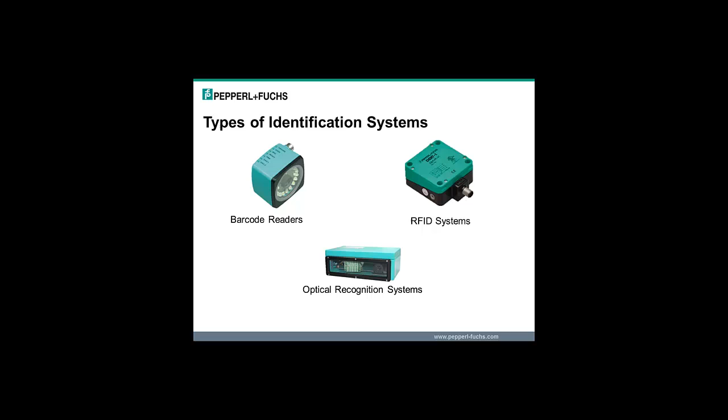An RFID system is a non-contact system that has a read head with an antenna that reads a tag. Data is transmitted between the two using a specific frequency. The third type is also optical, but instead of reading barcodes, it reads codes in other forms. For example, it could read a series of holes drilled in a code plate for use in the high-temperature paint industry.

The identification systems can be broken up into two categories: optical systems and RF systems. Optical systems use a camera, laser beam, or other type of imager to distinguish marks of a product. Because they are light-based, these systems require line of sight. They may not work very well in dusty and dirty environments because the optics could get blocked. Laser-based systems also have mechanical components that give it a limited life expectancy.

RF systems have no optical components. They can hold up in the dirtiest of environments. Line of sight is not required, so it can read through dust, the human body, water, and so on. About the only thing it can't read through is metal. You can also write to RF transponders.

Here's a quick look at a comparison between optical and RF systems. The one thing that stands out on the optical side as far as advantages is the integration effort. Optical systems have been used for years. Barcodes can be incorporated into scan sheets and routing documents with little effort and no additional cost. Barcode data is typically coded in ASCII, and once scanned by the barcode reader, appears on the screen as if you typed it. Many, if not all, barcode readers are interchangeable.

What RF systems lose in integration effort, they make up for in every other category. You can write data to tags, updating them on the fly. Line of sight isn't required because the RF system need not see the target. Also, unlike laser barcode systems that use a rotating motor, no moving components are required.

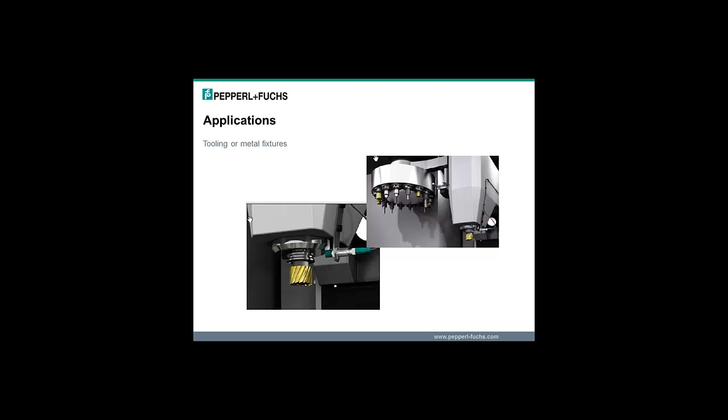This is a classic RFID application, and probably one of the first ones ever to use a Pepperl+Fuchs system. Machining centers need to verify that the correct tool is in the fixture before the machining operation starts. If the wrong tool is in place, it could cause hundreds of thousands of dollars of damage. In this picture, the green chip is mounted in the side of the tool holder, and the read head verifies the correctness of the tool before work starts.

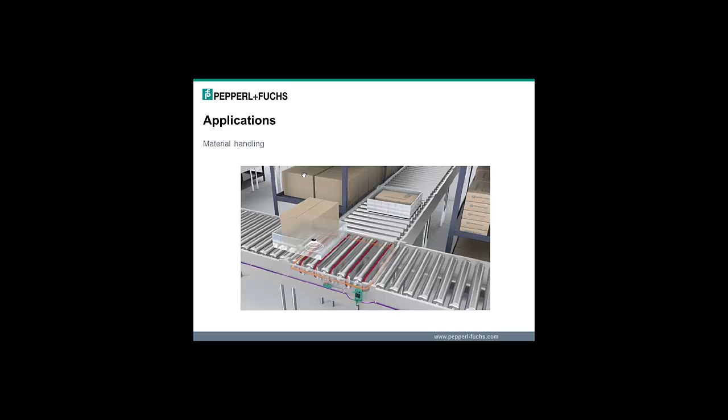RFID is common in material handling. The tag is mounted to a tote or pallet that carries the parts being modified or worked on. The work is performed at each station. Pass-fail information can be written back to the tag, making all historical manufacturing data ready for the next station. At the end of the process, a good part can immediately be passed and sold to a consumer, and bad parts can be routed to an offline rework station for repair. Later on, after repairs are complete, the parts can be sold and no bad products ever get to the consumer.

In process applications, hoses from a manifold frequently get connected together or get connected to a tanker truck. Before the valves are opened and a liquid product gets routed through the pipes, the RFID tags are read and connections are verified. A wrong hose connection can cause the wrong mix of products. All of that product could possibly end up in a landfill. Before RFID, everything was inspected by eye and double-checked by a second person. Even this was not enough to prevent mistakes.

RFID used in machine access is relatively new. The idea is to prevent anyone from entering the machine without the proper credentials. This might be an important process, and only a specific supervisor has the authority to perform it. These RFID systems go directly into PLCs and are located on industrial equipment, so standard commercial RFID door access systems are not appropriate. This also allows you to track the workers who use a specific machine, allowing for complete accountability for a job. This is just a small selection of applications.

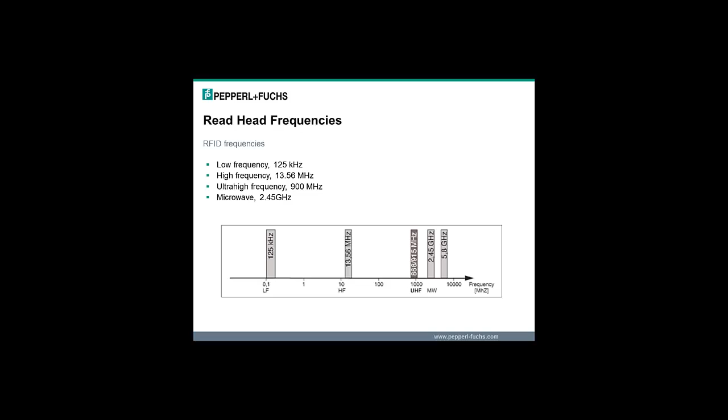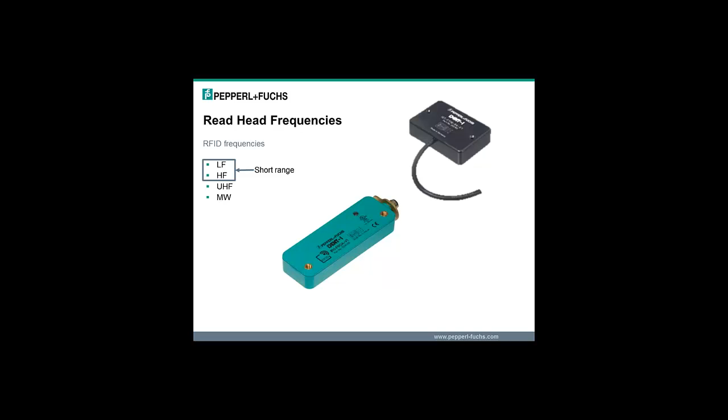Pepperl+Fuchs RFID systems are available in 4 main frequencies. These systems will be abbreviated low frequency, high frequency, ultra high frequency, and microwave respectively. In general, the lower the frequency, the less range you will get. The low and high frequency RFID systems are categorized into the short range category. Maximum range is typically 6 inches or less. The ultra high frequency and microwave frequencies will be our long range systems. Read range will be up to 6 meters.

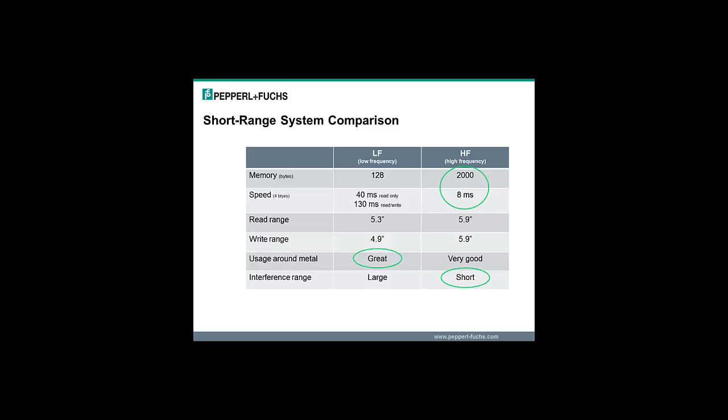The low frequency system was our first system. The lower the frequency, the more penetrating power the system will have, and it will be better around metal intensive environments. The high frequency system is also good around metal, but typically specially tuned tags or large spacers are used. The higher frequency system is an open system with many more chip manufacturers, resulting in higher capacity tags. The higher frequency system also results in cheaper tags, faster speeds, and a shorter interference range.

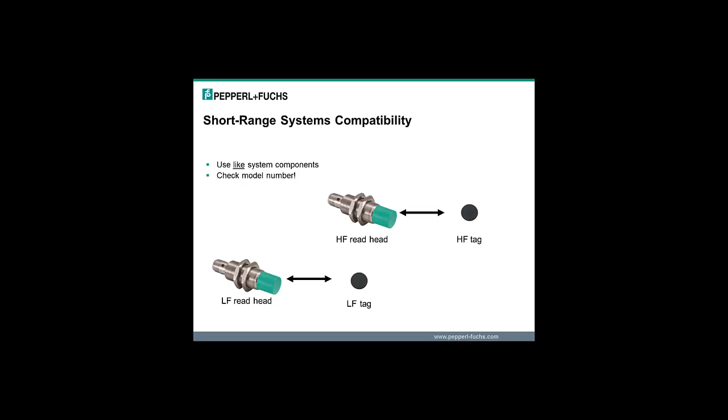All systems have a read head and tag. The tag may also be known as a transponder, and the read head could also be known as an antenna. Low and high frequency systems are not interchangeable. A low frequency read head must be used with a low frequency tag, and a high frequency read head must be used with a high frequency tag. Check the model numbers to make sure the system components are compatible.

The nomenclature is simple. All high-frequency systems start out IQ. For example, a read head is an IQH1-FP-V1, and a tag may be IQC21-30P. All low-frequency systems start out IP. For example, a read head is an IPH-FP-V1, and a tag is IPC03-50P.

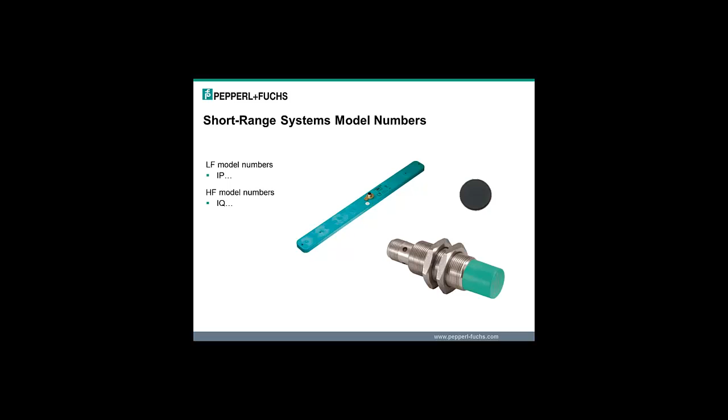Within the short-range RFID systems, the high-frequency system is special. Neither low-frequency or high-frequency systems are proprietary, but the ISO 15693 standard that high-frequency systems adhere to makes it widely adopted. There are a very large number of chip suppliers that provide products to companies like Pepperl+Fuchs. We then embed this chip and antenna coil into an industrial housing. We can read tags made by our competitors, and they can read our tags. There is no longer a worry that we will discontinue something that you can't get anywhere else. RFID systems are now worry-free, and your investment is safe.

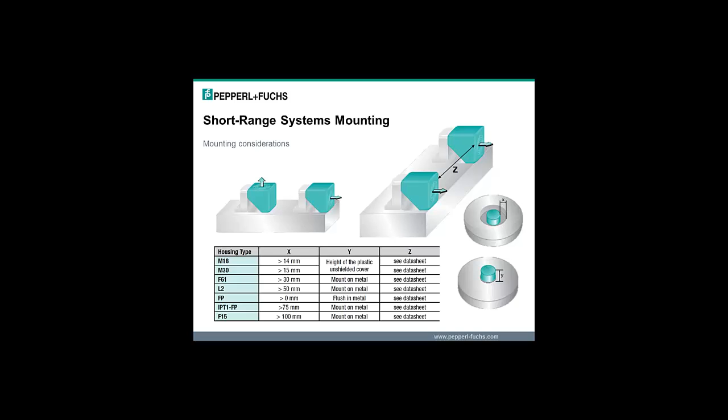When mounting our read heads in or on a metal surface, take note as to how far the plastic tip must be away from metal. The L2 Rhino-style housing must hang over the metal surface by 50 millimeters. The tips of the cylindrical read head must be completely exposed or flush with a certain amount of metal material removed. When mounting according to this table, you are guaranteed more than 75% of the maximum documented read range.

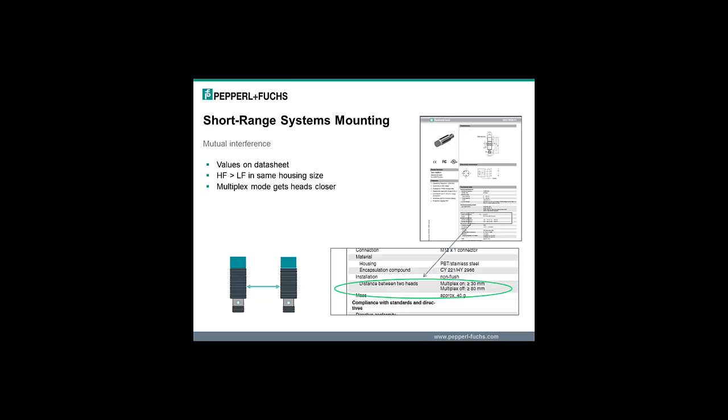If 2 read heads will be running at the same time and you want no multiplexing either by the user or the controller, then you must separate the 2 heads by the multiplex off specification. In this example, 2 high-frequency heads would be separated by 80 millimeters minimum. If 2 read heads will not run at the same time, or will be multiplexed automatically by the user or a controller, then you must separate the 2 heads by the multiplex on distance at a minimum. Even though the head is not running, the resonance circuitry of the read heads will still interfere with one another. For some perspective, the same size low-frequency head requires 180 millimeters of separation minimum.

Let's talk about the read range a little bit. The range is specific to certain tag read head combinations. On each tag datasheet, you will see a curve that shows where the tag can be read when the tag is parallel to the read head. All the read heads will be on one graph. Depending upon the tag design and the testing done, there may be curves for mounting on non-metal surfaces. We call this in-air mounting. There could also be curves for on metal with spacer, or for flush mounting in metal.

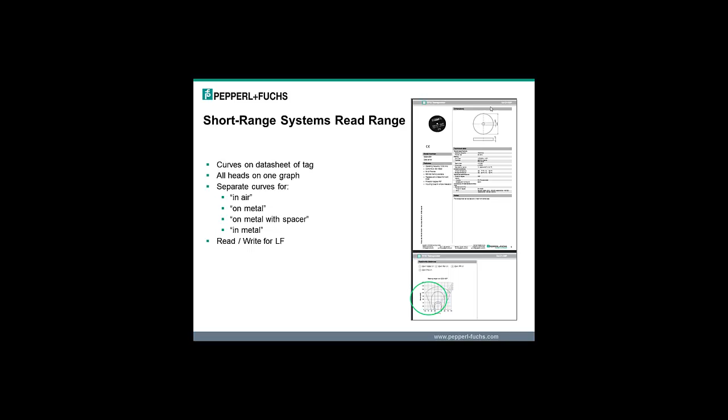High-frequency tags can be read and written at the same range, but the low-frequency systems have a shorter write range than read range. For low-frequency read-write tags, there will be 2 curves for each, one for reading and one for writing. This is an example of all the measured read range curves for the IPC03-50P tag with the 18mm, 30mm, flat pack, System P head, Rhino read head, and F15 large read head. You can see the largest read range for this tag is for the largest read head, IPH-F15-V1, at 110 millimeters. If you want to achieve the most range possible, bigger is better.

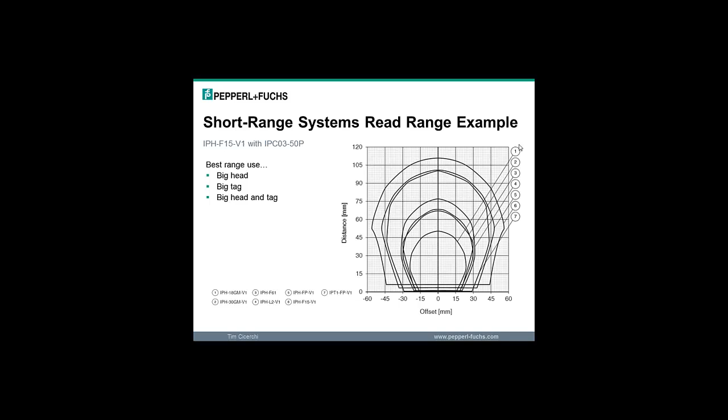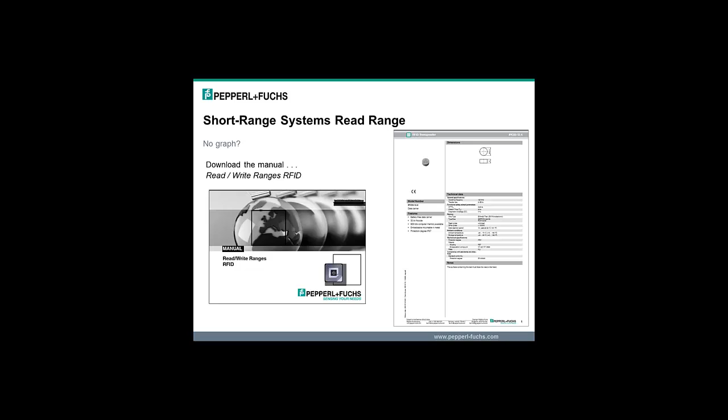Generating the graphs takes a lot of time, so not all tags, especially non-standard ones, have read range graphs. The maximum ranges have been successfully tested, however. If you look the part up on our website and check under Documents, you can download this file. It is called the Manual Read-Write Ranges RFID.

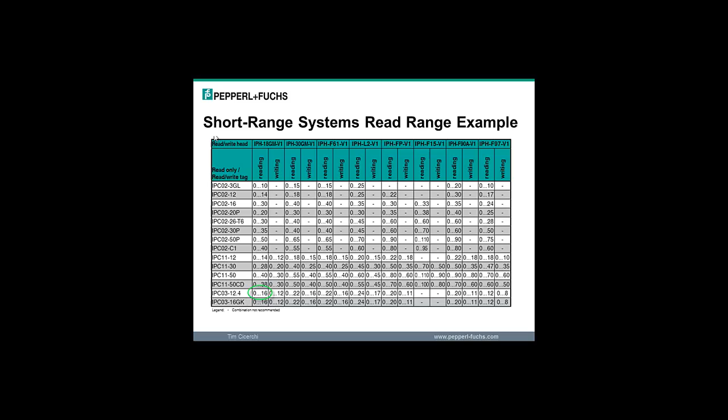This is a table from the Read-Write Range document. In this circled example, the tag can be read from 0 up to 16 millimeters for reading and 0 up to 12 millimeters for writing. Many times, a read head is triggered to read a tag as it is stopped over the read head. This read field curve, as listed on the datasheet, guarantees that 99.9% of all tag and read head combinations can be read under that curve.

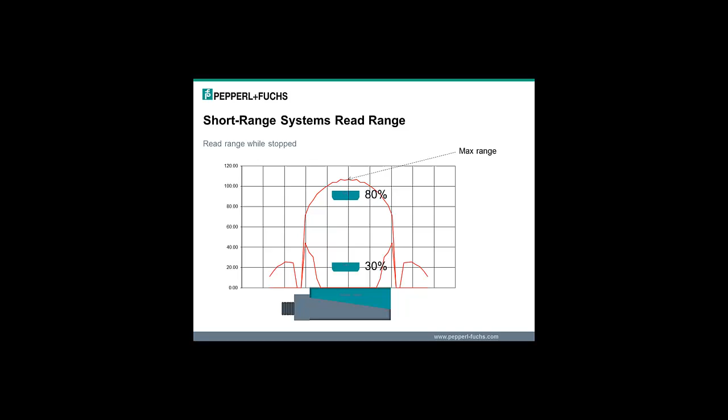It is suggested that you mount the tag from 30% up to 80% of the maximum range from the reader. Any closer and you risk mechanical damage if the tag hits the head. Any farther and the mechanical tolerances could take the tag outside the read zone. If the read head is running a continuous read command and the tag will be flying by the read head, you need to be a bit more particular about this mounting.

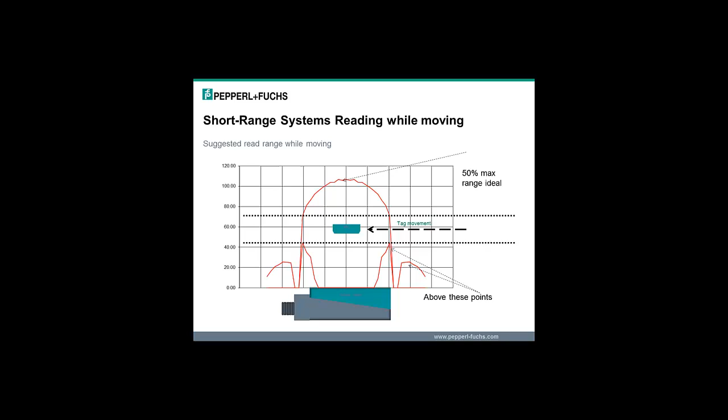To maximize the read speed, the tag needs to be in the field for as long as possible. This means the fattest part of the graph. We suggest mounting it at 50% of the maximum read range. You want to make sure the tag isn't any closer than where the read field starts to get narrow at the bottom, and it must be well above the side lobe. Don't make it any farther than where the read field starts coming to a point at the top.

Certain tags can be mounted flush in metal. Never recess the tag or the range may be severely reduced. Typically, aluminum has a little worse read range than steel, but check the datasheets to see if there are different read field curves. These special tags are thick and have ferrite cores. This ferrite material allows the read head to read the tag properly even when flush mounted in metal. Embeddable tags come as small as 8 millimeters or as large as 30 millimeters.

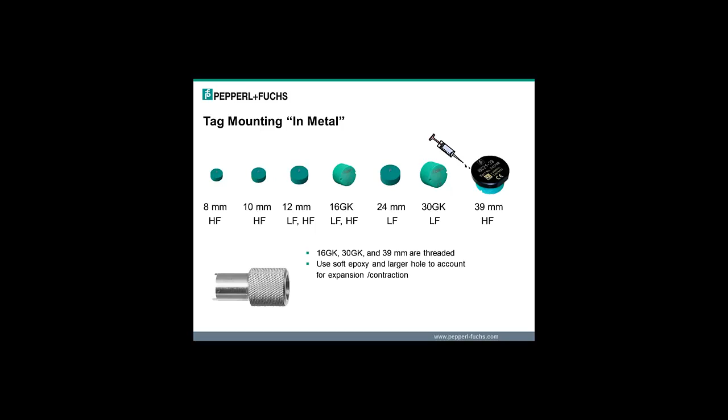The 39 millimeter tag actually has a 30 millimeter threaded body with a cap that lays on the surface of the metal. When gluing tags into place, use a soft epoxy to account for expansion and contraction of the different materials due to temperature. You also see here a picture of a tool that can be used to insert or remove the 16 millimeter or 30 millimeter tags. It fits in the holes located on either side of the front of the tag.

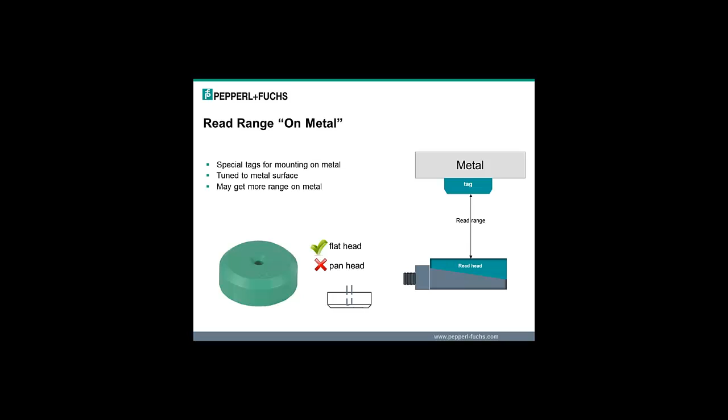Often, but not always, metal mount tags are thicker than normal tags. They have the spacer built into the housing. Use the correct screw when mounting any tag, especially if it is a high temperature tag. If the tag is too tight, the housing could expand and crack under the pressure. The metal mount tags range in design from the conveyor mount rectangular style to thick cylindrical versions. There is also a special high-frequency metal stick tag that has an adhesive back. These tags should only be adhered to a smooth, clean surface. Once attached, they won't come off without damage to the tag.

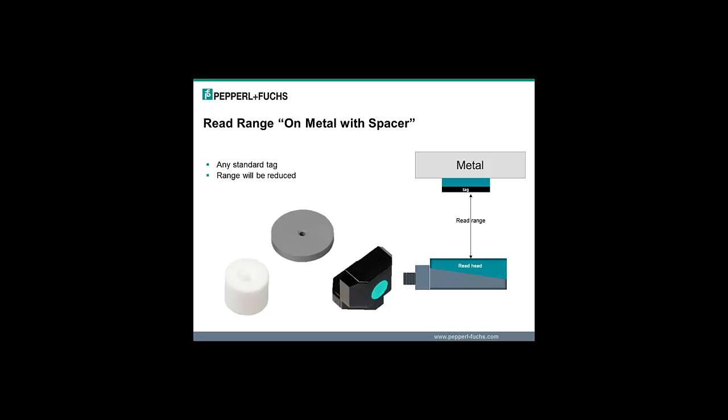You can also take a standard thin tag and mount it on metal using a spacer. There may be a read field curve on the datasheet with the range with 10 millimeter spacer. Also in the read range manual, there is a table for this specific case. Any tag that uses a spacer over 30 millimeters will get little or no read range reduction. Check out the different accessories available. We offer 7 millimeter spacers, 30 millimeter thick spacers, and mounting blocks for 16 millimeter tags.

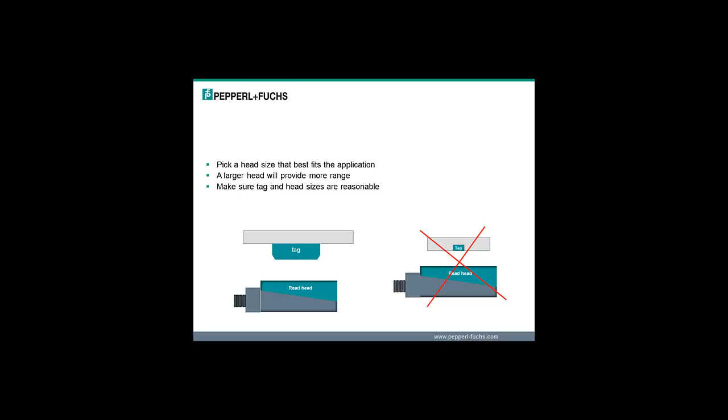You should also use hazardous location tags with it. Otherwise, just pick the read head that physically fits best in your application and that gives you the range that you need. To recap, when matching up a tag and read head, make sure the sizes are reasonable. For example, you may not want a large flat pack read head matched up to a 10mm diameter tag.

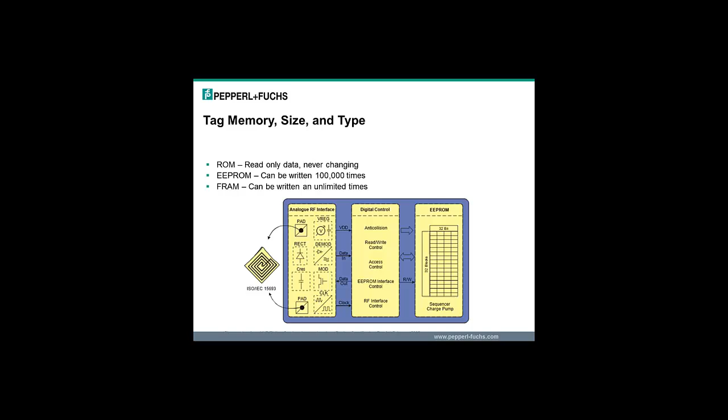If you are going to be writing to the tag hundreds of times a day, then think about using the FRAM tag. If you want a read-only tag, you don't have to focus just on the IPC02 low-frequency read-only tags. All tags have ROM data on them. As long as you stay within a specific model number like IPC03, all tag numbers will be unique. We call these unique read-only codes that were lasered at the factory fixed codes. Our available tag options are ever increasing.

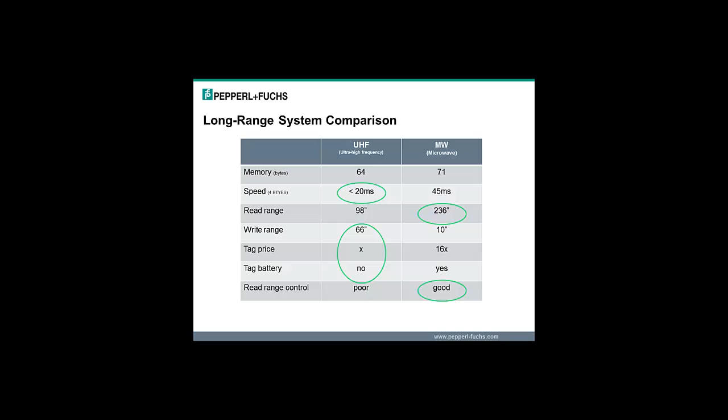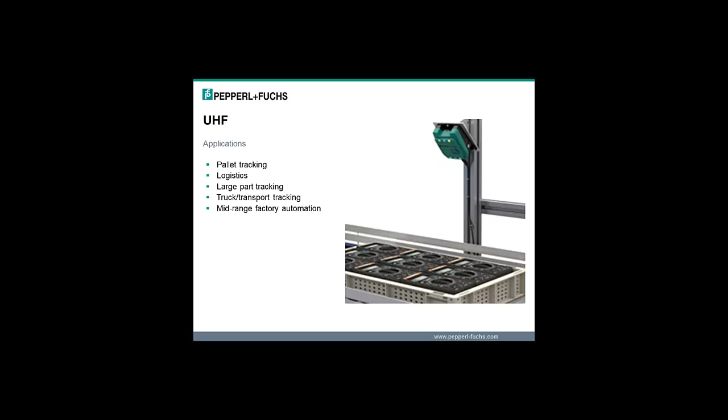There is no battery, which drives the cost down to as low as 10 cents per tag. Write range is a lot longer than microwave, but I think most people use both microwave and UHF systems as read-only systems. The unique identifier on the tag is used to distinguish one tag from another. Because UHF tags have no battery, many long-range logistics applications open up. You can track pallets in and out of a facility, and you can track trucks through a gate access system. Well-controlled UHF systems will also be used on the factory floor to track cars and other large objects.

The UHF frequency spectrum is controlled by the specific telecommunications agencies from within that country. You cannot buy one reader and expect to use it in the USA and Germany at the same time. There will be at least 3 specific models for various areas around the world. The USA version will work with most parts of North and Central America. Other readers will be for Europe and China. Other countries around the world may also fall into one of these frequency bands. In addition to frequency bands, every country has certain UHF frequency access and power requirements.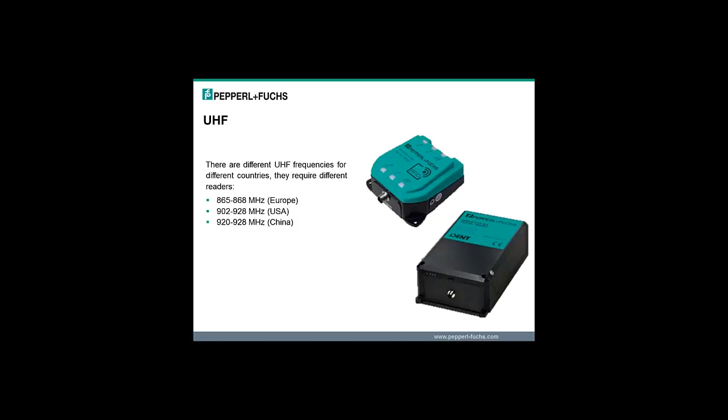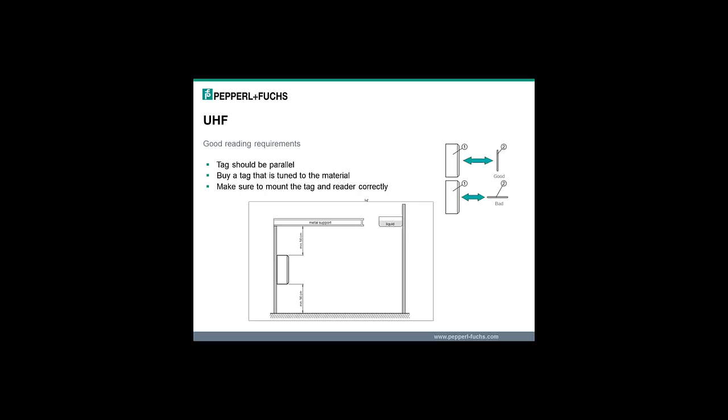Tag mounting in UHF is not simple anymore. You have to be aware of the material that is between the tag and reader, as well as the material the tag is mounted on. Typically, you buy a tag for mounting directly on metal or one for mounting on non-metallic surfaces. When setting up a UHF system to maximize range, the tag should be parallel to the reader. Also, obstructions around the reader and tag must be taken into consideration. It isn't just the object directly between the tag and reader that has an effect, but also the devices next to them that will have an impact.

Most UHF tags are polarized. You can use a linear, polarized antenna and align the tag and reader either vertically or horizontally, or you can configure the reader as a circular polarized antenna. A circular polarized antenna can read a tag in any orientation as long as it is facing the reader.

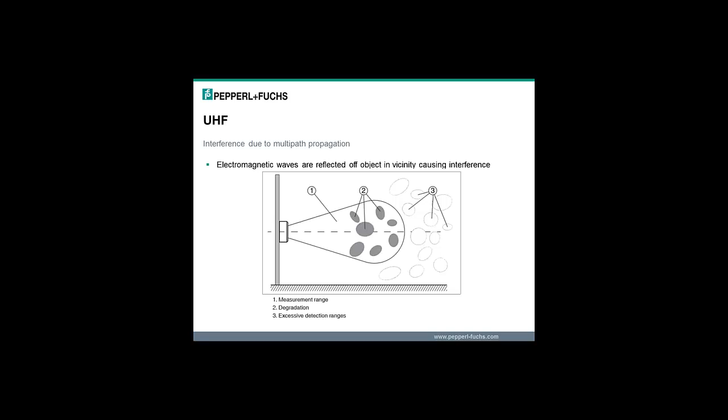UHF systems can be susceptible to interference. The interference is caused by the field generated by the reader bouncing off objects in the vicinity of the tag and reader. You can get two different effects. Signals can combine in a degrading effect, causing a hole in the read field. If you put a tag in this hole, it would not be readable. The second effect is an additive effect where an excessive read range can be achieved. This can lead to unforeseen consequences of reading a tag in another work zone or another production line.

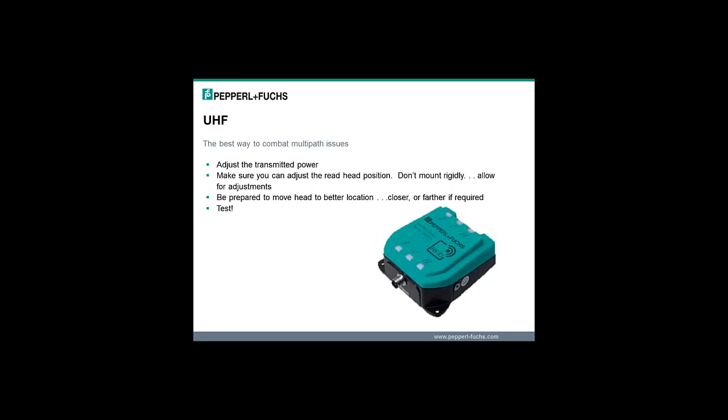To minimize multipath propagation problems, try to keep the read power as low as possible. Keep as many obstructions out of the way as possible. In your design, allow for adjustments. Use accessories that allow you to move the reader into different positions and make new trials. In the end, you're going to have to test your system to make sure it performs the way you want it to.

There is a huge market of UHF tags. You can find tags that range from 10-cent sticky tags to $30 high-temperature tags. All tags have a unique identifier as well as a user-definable EPC code. In addition, there may be a certain amount of read-write data available for use.

We say microwave when talking about a frequency of 2.45 gigahertz. It is true that it is the same frequency that is in your microwave oven, but at far less power. It is the same safe frequency that is used with a Bluetooth wireless headset, keyboard, or in your car. Also, it is the same as Wi-Fi that you use at home, 802.11b or g.

Microwave applications are long range. Because the maximum range is 6 meters, it is perfect for final assembly for an automotive manufacturer. It is also used for mobile transport tracking of trucks, buses, or trains. It is also used in other factory automation jobs where long read range is a must.

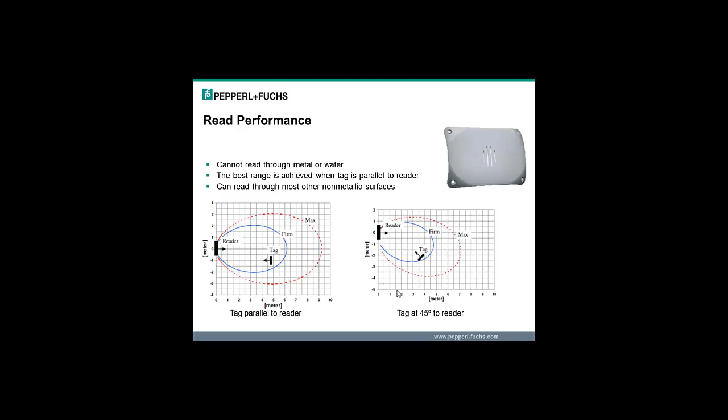The two main things that will affect the range are water and metal. They will obstruct the view of the tag to the reader. The mount of the tag on a metal or non-metal surface is not a concern. Either are okay. For maximum range, the tag should be oriented parallel to the reader, and the long dimensions of the reader and tag should be lined up.

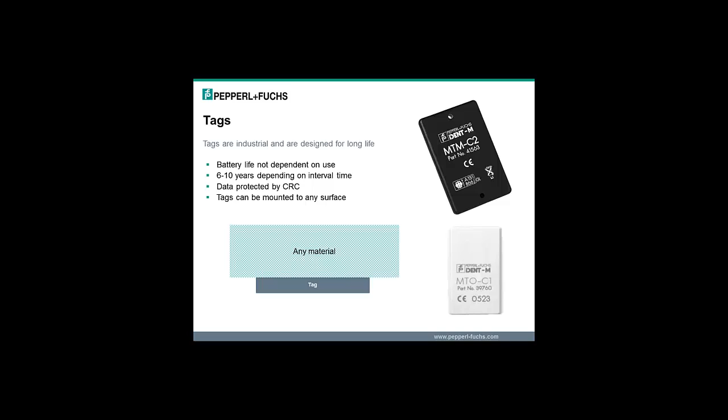The microwave tags send an ID frame to the reader that contains the read-only data, user-definable data, the CRC, and the status. You can also configure the frequency at which this data is sent. The quiet time, also called the tag interval, is a multiple of the ID frame. The quiet time is either 0, 4 times the ID frame, 8 times the ID frame, or 16 times the ID frame. The longer the quiet time, the longer the battery will last. During this quiet time, other tags will have a chance to talk. So in general, the longer the quiet time, the more tags can be read at the same time.

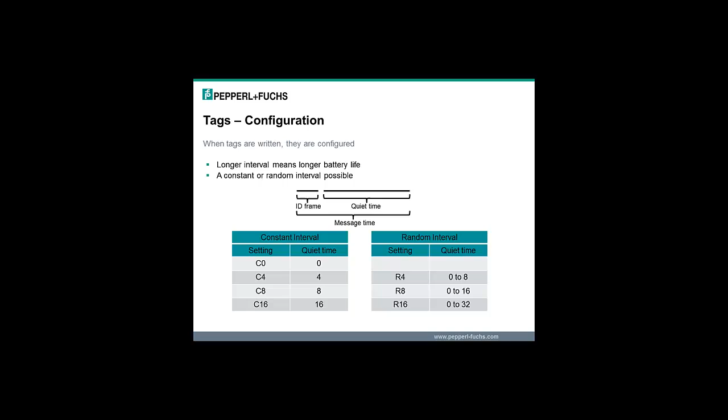To reduce the risk of two tags sending their data at exactly the same time, a random interval should be used when multiple tags are in the field. The read-only MTO tags will always send data at an R8 random interval.

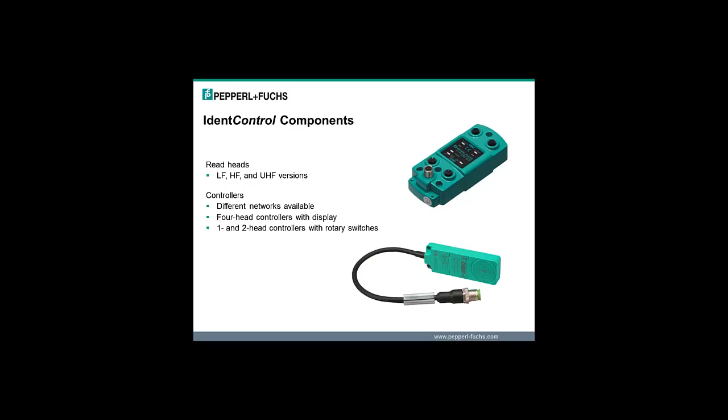There are 4 different RFID systems provided by Pepperl+Fuchs. They are IDENT Control, IDENT-I System P, Standalone Systems, and IDENT-M System T. I'm going to talk about each one of them next. IDENT Control is a very powerful system consisting of a read head and a controller. You pick the read head with the right frequency, size, and read range, and then pick a controller that will connect to the upper level bus that you need.

The controller concept allows us to make one network controller and then have it immediately available for all low frequency, high frequency, and ultra high frequency ident control compatible read heads. Read heads can be as small as 18 millimeters in diameter or as large as we want. Using a controller allows for the integration of a wide selection of connector options and multiplexing.

Cost is reduced because only one network is needed for up to 4 read heads. Also, the bandwidth is reduced because one TCP/IP message is sent per controller rather than per read head. Easy configuration is now possible. A graphical display and keypad or rotary switches can be used to configure the network.

2 controller options are available. A 4-channel version has a larger housing that is capable of supporting push-pull connectors, a graphical display and keypad, and up to 4 read heads. The ident control compact supports 1 or 2 channels and is limited to configurations using rotary switches. All network interfaces and power connections are using standard M12 connectors.

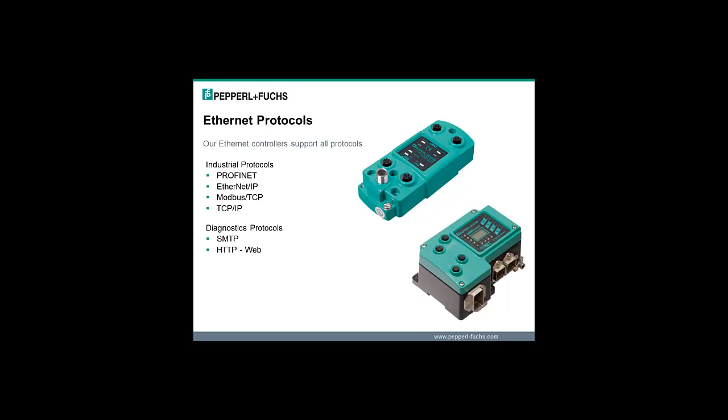We have industrial controllers made for DeviceNet, Profibus, Ethernet, Serial, CC-Link, and EtherCAT. Not every network is available for both the standard or ident control compact version. Pick the controller and network interface that best fits your needs. Our Ethernet controllers support all Ethernet protocols at the same time. If you communicate to these controllers with Profinet and then decide to change your PLC platform, you can quickly and easily switch over to EtherNet/IP or another protocol.

In addition to the industrial protocols, SMTP email protocol is also supported. If a status message is generated because no tag is present or a read head is damaged, an email can be sent to a maintenance crew to go and fix the problem. The web interface allows you to quickly look at the configuration of the unit, and all recently sent commands and responses are logged. This log can be analyzed as an advanced troubleshooting tool.

People sometimes ask what network protocol to choose. The customers know, just ask them. Based on the PLC you are using, the network choices are typically obvious. For example, on Allen Bradley PLCs, EtherNet/IP is the network of choice, but Siemens will use Profinet. Mitsubishi will use CC-Link, and Schneider will typically use Modbus TCP protocol.

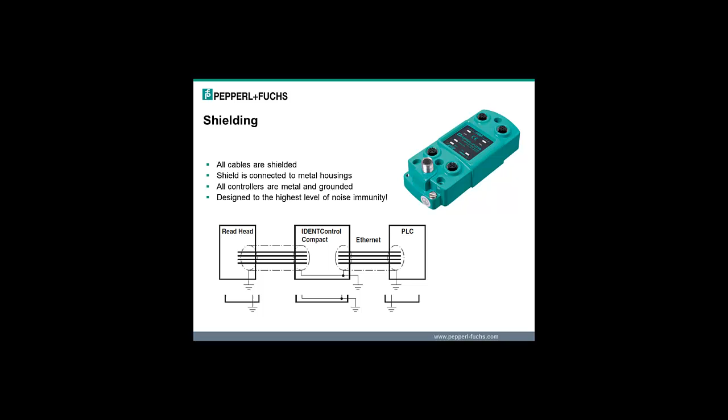All controllers are made from thick cast metal housings. We apply the Faraday cage principle here. All devices that are shielded properly can't cause interference and can't be interfered with. The metal read head and controller housings are grounded at multiple points to allow the closest path to ground for all noise sources.

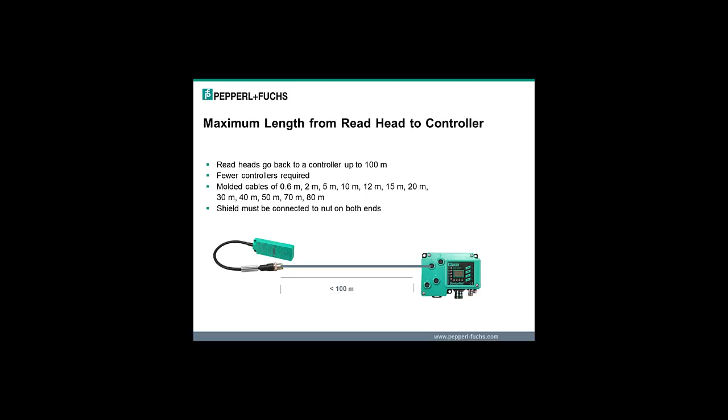Often people ask how far they can run the read head to the controller. The limit is 100 meters. You could even go further if you increase the gauge of the cable. The cables are just standard shielded cables. The shields of these cables are connected to the coupling nuts on both ends.

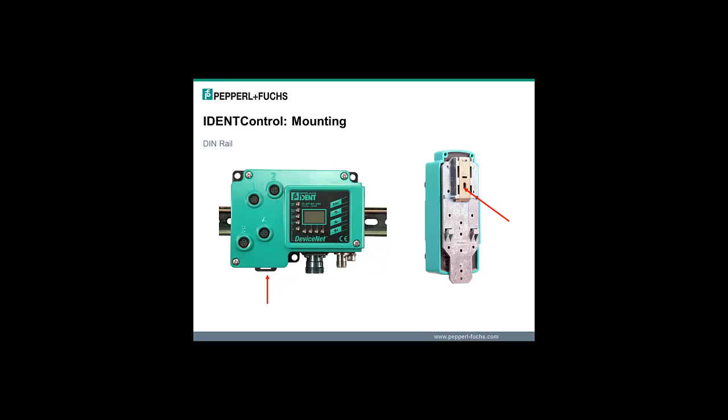There are multiple through-hole mounting points on both the 4-channel controllers as well as the compact versions. The 4-channel controllers have built-in DIN rail clips. The compact controllers can be connected to the DIN rail if you use a DIN rail mounting accessory. If your compact controller has rotary switches for configuration, just make sure that you configure the controllers before you mount the DIN rail base on the back. This DIN rail adapter will cover almost the entire back of the unit.

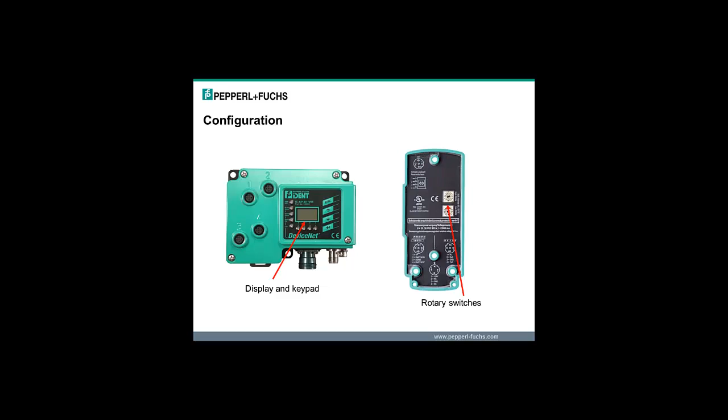As stated before, the 2 configuration options are the graphical display and keypad or the rotary switches. Pick the controller that best works for you. The graphical display is unique because a lot of configuration options are possible using it, including inputting IP address, subnet mask, and gateway information for the Ethernet controllers. Read heads can be activated for troubleshooting purposes. Read heads can be configured with the correct tag type settings.

Use only heads designed for ident control. These heads all have an H in the model number, like IPH, IQH, or IUH. These heads must be connected to a controller and do not work standalone.

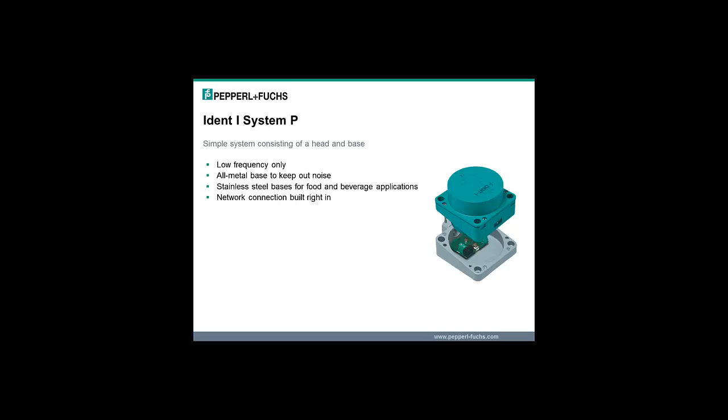Our ident-I System P system is a low-frequency system that is also very popular. It is especially useful for small installations requiring one read-write head connected back to a PC or PLC using RS-232. All connections are made directly in the base of the read head itself. There is a single read head model, IPT1-FP. It is a larger flat pack read head. Because of the size, typically only larger tags, not embedded in metal, are used.

There are a number of base options. The short, compact base options are for RS-232 or RS-485 serial communication. Even stainless steel bases are available for food and beverage applications.

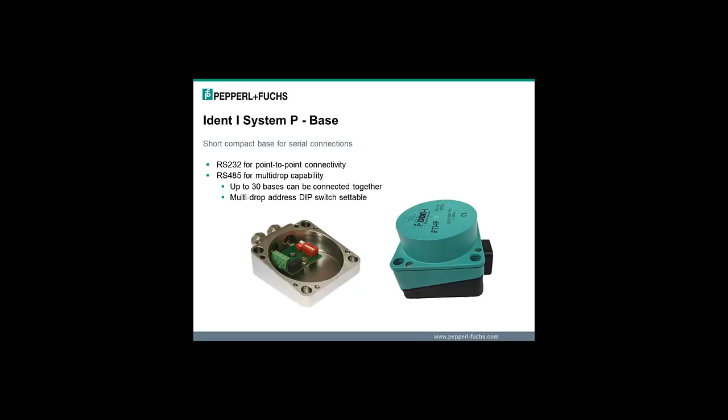Multi-drop bases allow all heads to be daisy-chained together and then connected back to a single PC. Each head can then be polled one after another by an upper-level control system. We have a base that's a bit larger for use with our other industrial buses, Profibus and Interbus.

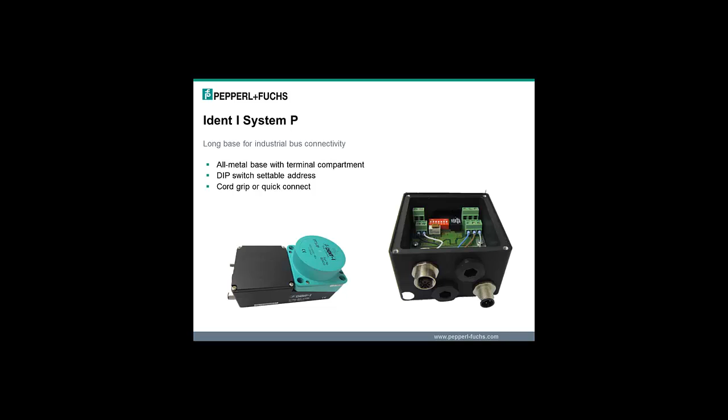These bases have cord grips or quick disconnects. All dip switch settings are located under the mounting cover for easy access. The bases are all solid machined aluminum for superior noise immunity. For all System P read head and base options, go to our www.sensing.net/readers webpage. Along with ident-I System P, these are some of other standalone options.

All of these heads are being used primarily by OEMs. The main reason is they have the time and know-how to integrate these RS-485 read heads into their control system. The sizes are as small as 18 millimeters or as large as flat pack read heads.

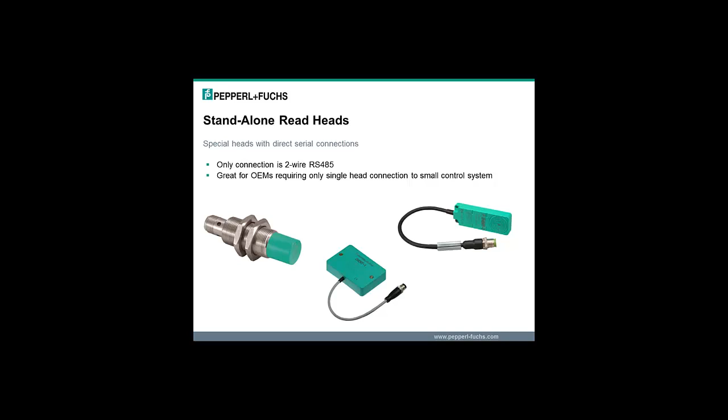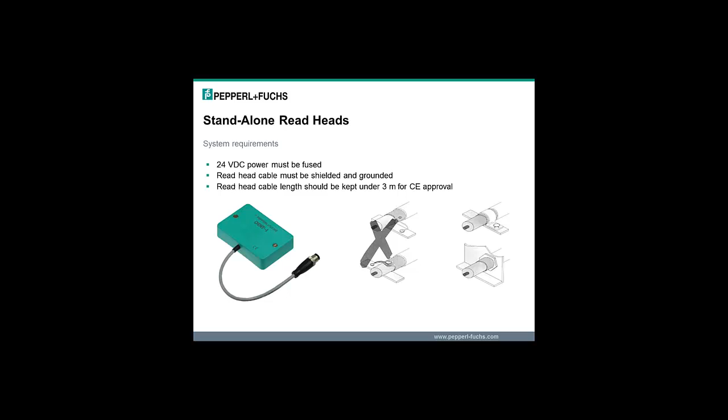The system requirements are important. Make sure to use shielded cables when connecting these heads and ground the shield properly on both sides. The 24-volt DC power must be fused to prevent a surge from damaging the unit. Also, for the highest noise immunity and CE approval, you should keep the read head cables 3 meters or shorter.

The most popular way to use this head is a simplex configuration. The read head powers up and starts reading automatically. When a tag arrives, the data is automatically sent to the PC. When the tag leaves, an additional status message is sent to the user with updated information that the tag has left the read zone.

Some high-usage customers have us do the pre-programming. Other customers will just do the reconfiguration themselves before installing them on the machine. All standalone read heads have a T in the model number, IQT, IQT1, and so on. The IQT and IQT1 read heads differ in the ability to read the IQC33 type FRAM tag. The IQT1 read heads are also much faster.

There are 2 protocol options. The R4 option is a simple point-to-point protocol option with a built-in RS-485 termination resistor. The R4M is a simple multi-drop protocol where up to 30 read heads can be bussed together. The heads are just polled one at a time to retrieve the tag information.

A model number selection guide can be found at www.sensing.net/readers. For high-volume OEM special opportunities, please contact the product managers at Pepperl+Fuchs.

The ident-M System T is our long-range microwave system. This system is also standalone. You pop the cover off and you get connection to Ethernet ports, 2 serial ports, digital inputs, and 3 outputs. We have 2 different models of read heads available. The first is a 3-meter read-only unit. It can read read-only and read-write data, but it can't write any data to tags.

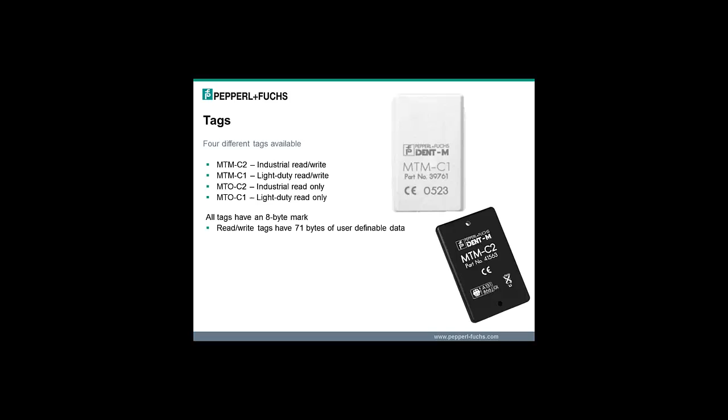4 different tags are available for various applications. There are 2 housing styles, light duty and industrial. Also, you can get a read-only or read-write version. All tags include an 8-byte mark. This is the read-only code, sometimes called the fix code. It is guaranteed unique. Up to 71 bytes of data can be written to the read-write tags.

We're often asked, what system do we choose? For short-range systems, start with ident control and our high-frequency heads. They will give you almost any industrial bus connection, high-performance read heads, and low-cost tags. Use our ident-I System P solution when only a standalone RS-232 is required. Use the ident-M System T reader for long-range applications. Use our standalone RS-485 read heads for high-volume OEM accounts.